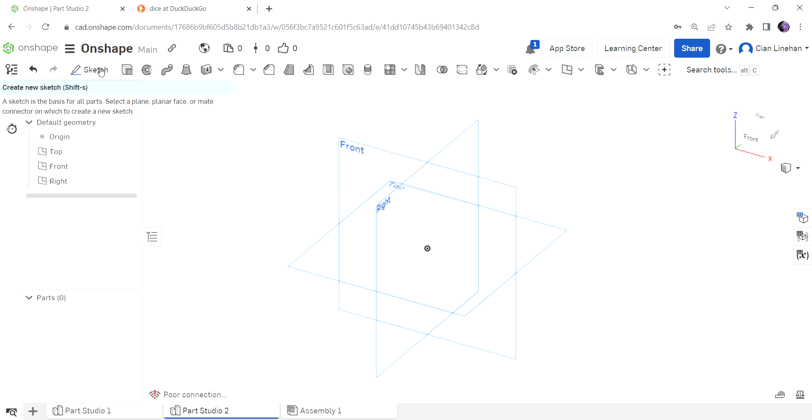To start, we're just going to make a sketch on the top plane, and we're going to make a center point rectangle that is 2 inches by 2 inches. Okay, it's a big dice, okay?

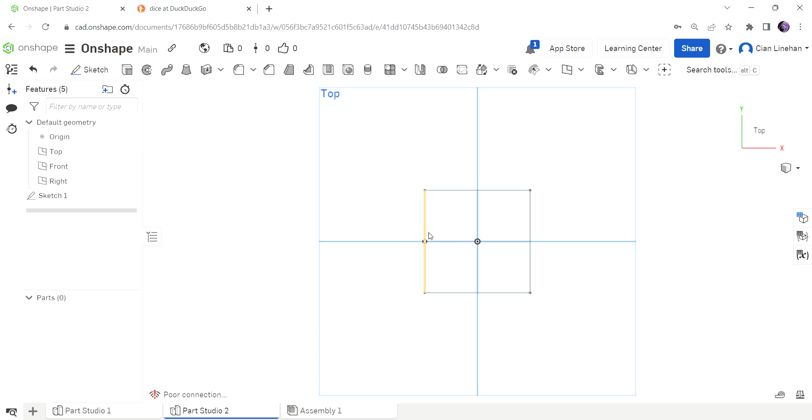We don't judge here. Now we're gonna make an extrude that is 2 inches, and it's gonna be blind, but we're just gonna make it symmetric, so you can see the difference here. If we just make it symmetric, it'll extrude the same amount out either side. See? Pretty simple. Cool.

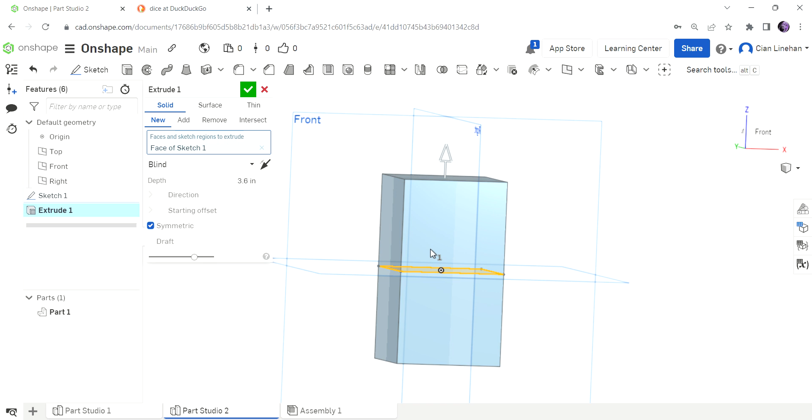So now we have our dice. Thank you for watching the video. Be sure to catch the next one. Bye.

Just kidding. I know, I'm hilarious. Anyway, okay.

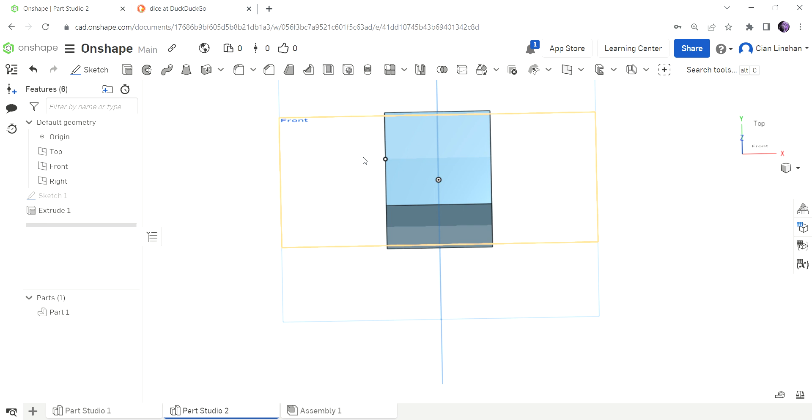Now I'm just gonna get rid of that. It doesn't exist anymore. Cool.

Now we're gonna make a sketch on any plane, really, and we're going to make a sphere. If you'll remember, this was a really early challenge in the basic tutorials. I'd encourage you to watch those if you haven't yet, but I can't force you to do anything, I guess. Okay, so we're gonna make a sphere.

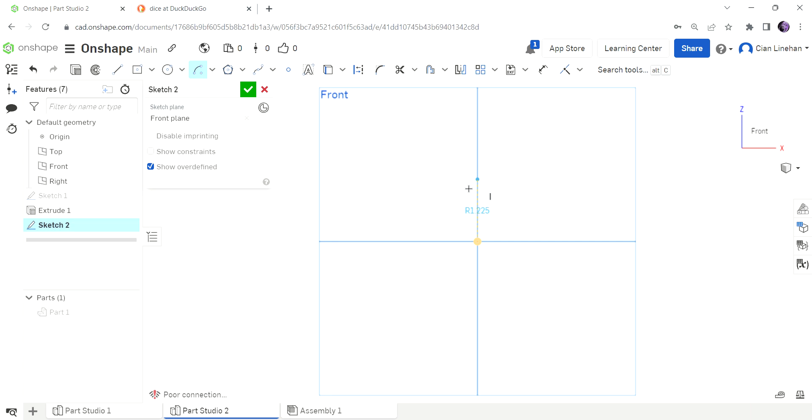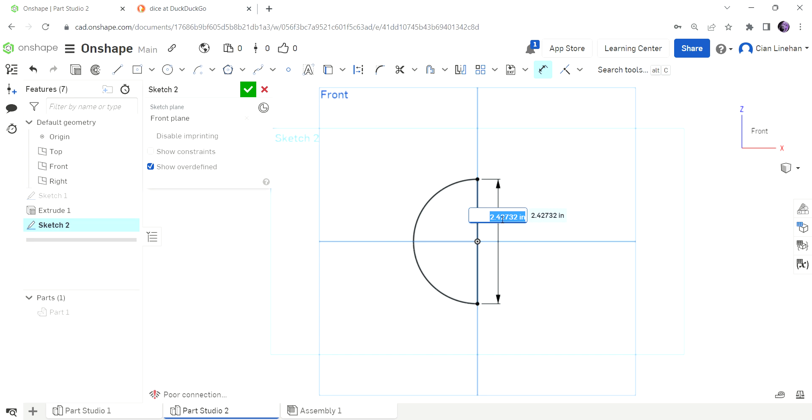So we're just gonna make a half circle. Cool, and the length of this, something that we can change, but you're gonna want it slightly bigger than the length of the cube. So I'm just gonna say 2.5 to start, and we can change that later.

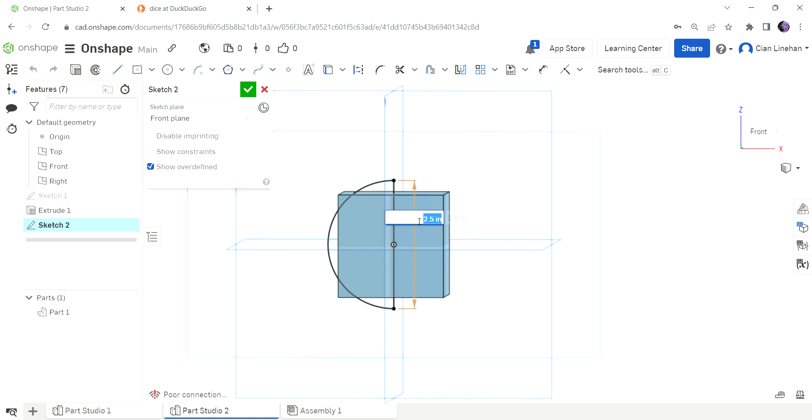So now I'm gonna make this visible again. Okay, I think we're gonna have to go a bit bigger than 2.5. Oopsies. So maybe 2.7. I know, what a horrible number. 2.75. There we go, happy.

Okay, so now that slightly catches the edge. Beautiful. Okay, so now we're going to revolve this, like you do.

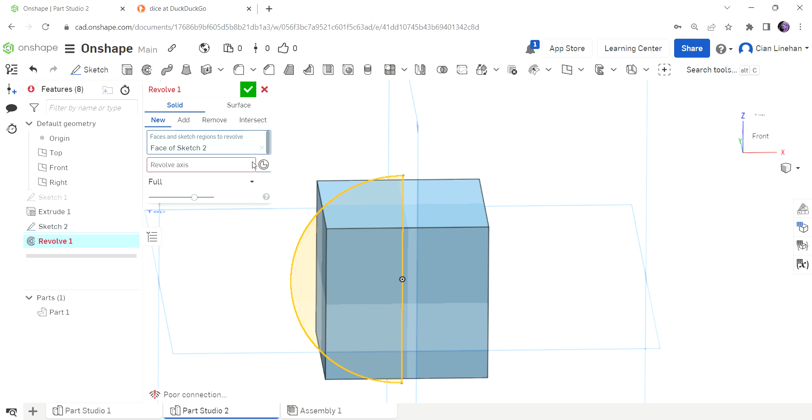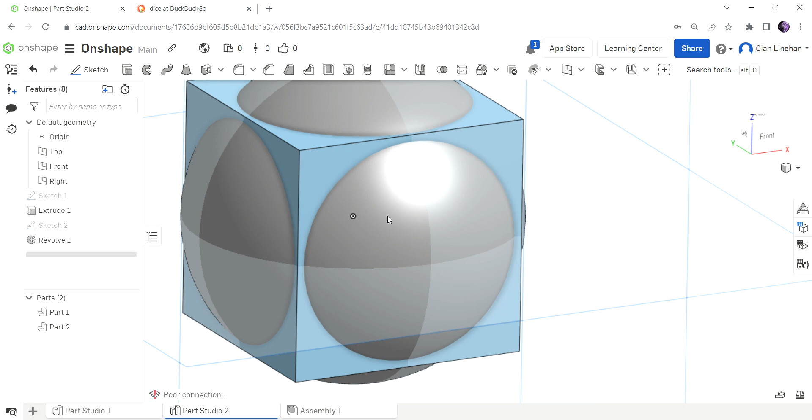Okay, and now we've got this thing, right? So if you think about this, here, let me just change the colors, you know, so it'll be a good demonstration. Oopsies, oh god. There we go. Okay, so the gray is the sphere, obviously, and the blue is the cube.

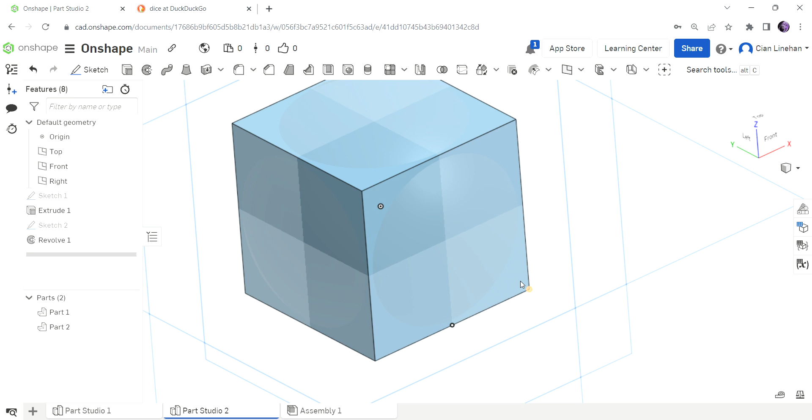So you'll see within here, we can't actually see it, but just trust me, it's there. Actually, you can make it kind of clear, you know, like this. I don't know if that's better. Is it? Yeah, it's not, whatever. Anyway, let's fix this.

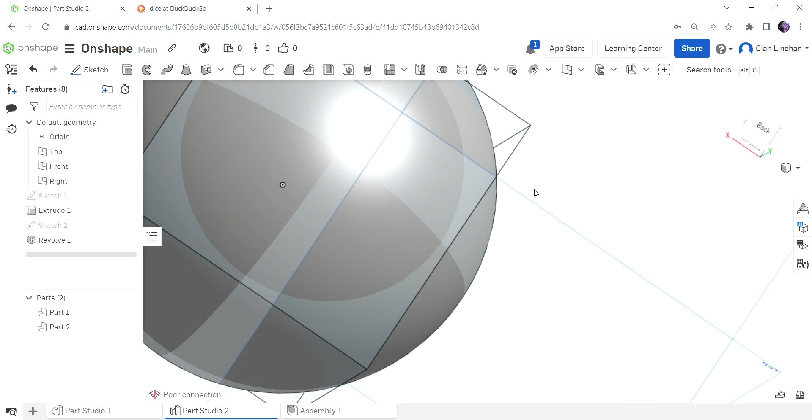I'm sorry, okay. Actually this works. Okay, you can kind of see where, so you'll see right here at the corners, right? Only the cube exists there. And on these parts that stick out, only the sphere exists.

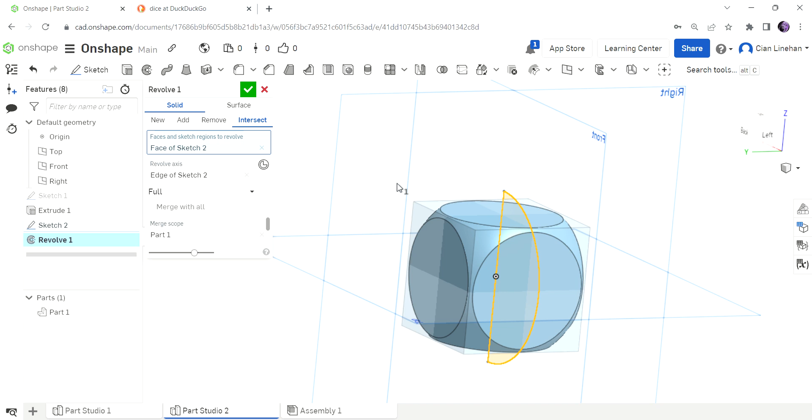So we are going to make an intersection. Very fancy. And so instead of just making a new one of these, we can intersect it with — I mean, it defaulted to part 1, but just in case you have multiple parts, you're just going to select the part you want to intersect it with.

And would you look at that? We have our cube shape. It's beautiful.

Okay, so next, you could make all the little dots in here, but I reckon you guys already know how to do that if you've watched the other tutorials, so I'm not going to waste your time, because we were just learning about intersections today. But, ooh, that looks kind of cool. Anyway, sorry.

Get distracted. I'll see you in the next one then. See ya. Bye.